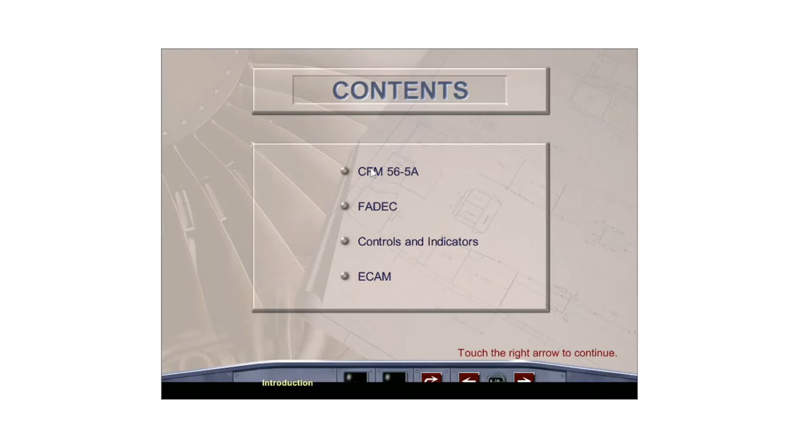The CFM 56-5A engine mounted on the A320 is a high bypass turbofan engine producing 25,000 pounds of thrust at sea level. It is produced by CFM International, a joint venture between SNECMA of France and GE Aircraft Engines of the USA. The engine core, based on the GE F101 engine installed on the Rockwell B-1B bomber, is manufactured in Cincinnati, and the low-pressure system is manufactured by SNECMA in Villaroche, France, where final assembly takes place.

The bypass ratio is 6.2 to 1. Approximately 80% of the thrust is produced by the 71.5-inch diameter fan, and the remaining 20% of the thrust is produced by the engine core. The engine weighs approximately 5,000 pounds.

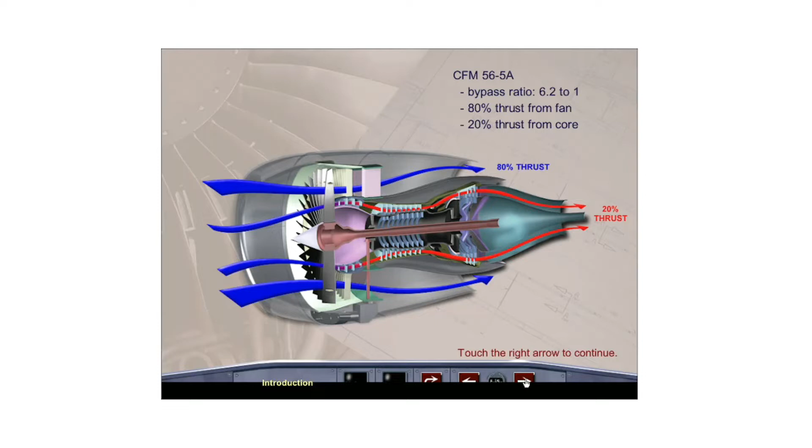A pylon attached to the wing supports the engine by 2 mounts, each secured to the engine by 4 bolts. The engine is enclosed by cowls that ensure the proper flow of air around the engine while protecting the engine and its accessories. Lightning protection is provided by using a conductive graphite material within the cowl skin. Reverse thrust is achieved by the positioning of 4 pivoting blocker doors that redirect the fan air forward.

The CFM56 engine is comprised of 4 primary modules: the fan and low-pressure compressor, the high-pressure compressor, combustion chamber and high-pressure turbine, the low-pressure turbine, and the accessory gearbox.

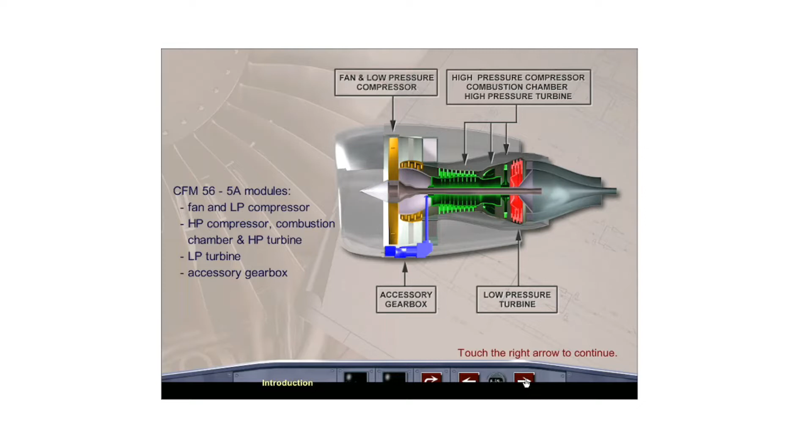The low-pressure, or N1 rotor, consists of a single-stage front fan and a 3-stage low-pressure compressor, which supercharges the inner portion of the fan airflow. They are driven by a 4-stage low-pressure turbine connected by the fan shaft. 4 stages of stator vanes are installed within the compressor section. The design of the spinner cone mounted on the front of the fan prevents the need for engine nose anti-icing.

The high-pressure, or N2 rotor, consists of a 9-stage high-pressure compressor driven by a single-stage high-pressure turbine. Compression is progressive as air passes through the successive stages of the compressor blades.

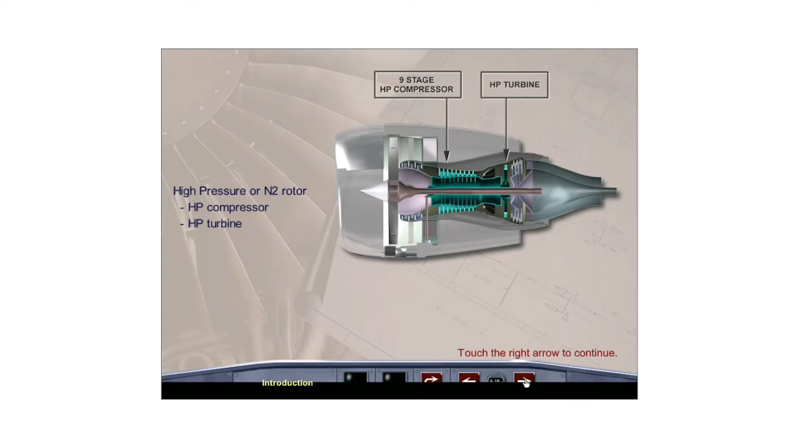The annular combustion chamber is located between the high-pressure compressor and the high-pressure turbine and is fitted with 20 fuel nozzles and 2 igniters.

The accessory gearbox, located below the fan case, is driven by the N2 rotor through a system of shafts and gears, and provides mechanical power to engine-mounted accessories, including the hydraulic pump, fuel pump, engine generator, FADEC generator, and starter unit.

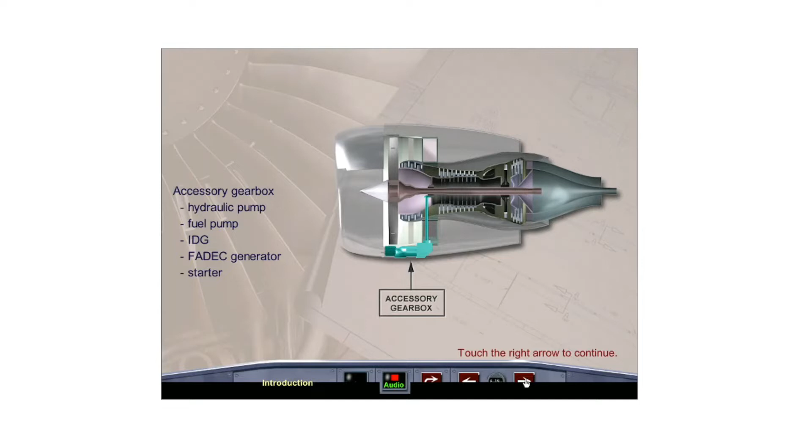Drain lines and collectors are installed to collect and carry waste fluids and vapors from areas around the engine that may leak and deliver them overboard through the drain mast located at the bottom of the cowling. Some fluids are discharged immediately, others are contained in a holding tank and discharged in flight when the aircraft speed reaches 200 knots.

Each engine is equipped with a Full Authority Digital Engine Control System, or FADEC, which manages all aspects of engine thrust and controls the engine start sequence.

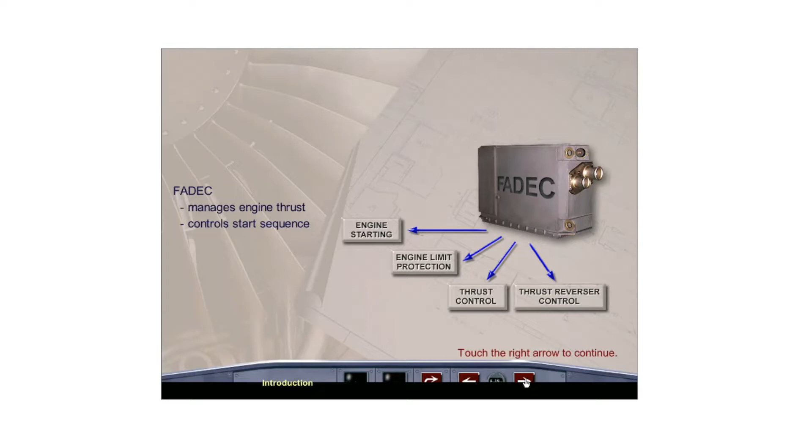The thrust levers are located on the center pedestal. The thrust lever control system is fully electrical. There is no direct mechanical linkage to the engines. Each thrust lever is also fitted with a reverse latching lever and an auto thrust instinctive disconnect push button.

The engine control panel, located aft of the thrust levers on the center pedestal, includes the engine mode selector, the engine master switches, and the fire and fault lights.

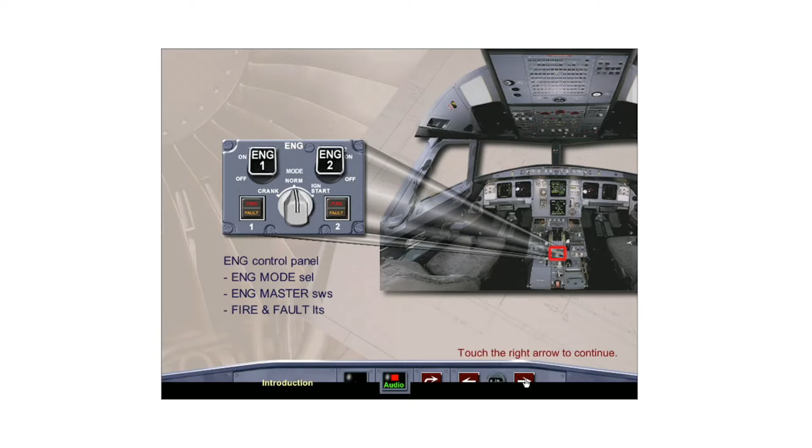The engine manual start panel, located on the overhead panel, is used to start the engines when an automatic start is not possible, or for dry cranking of the engine.

The engine FADEC ground power panel, located on the overhead maintenance panel, is used for maintenance purposes only to supply the FADEC with electrical power when the engines are shut down on the ground.

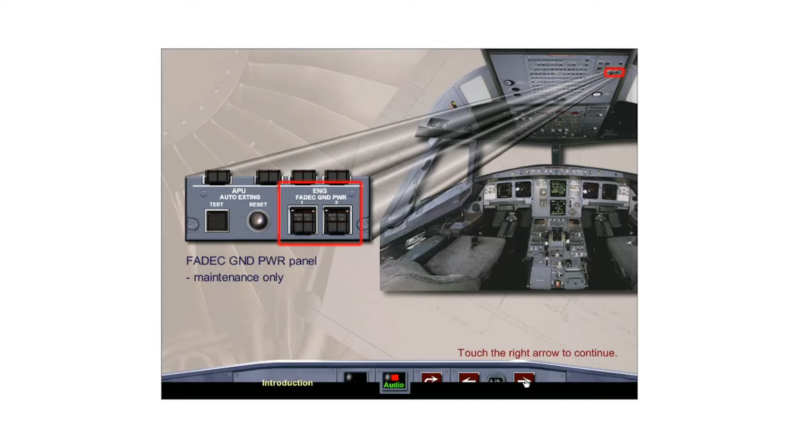The upper ECAM permanently displays the engine primary parameters to the flight crew. The secondary engine parameters are displayed on the lower ECAM engine page either automatically during engine start, when takeoff power is selected, and with certain engine faults. The ECAM engine page can also be selected at any time by the crew on the ECAM control panel.

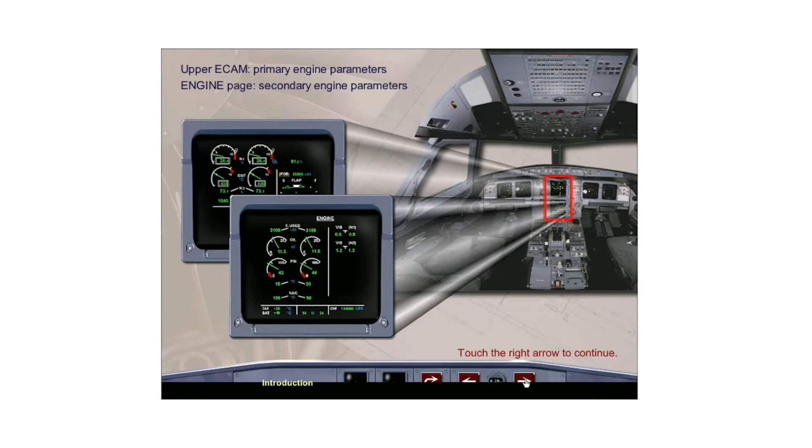Fuel used, oil quantity, and vibration indications are repeated on the ECAM cruise page.

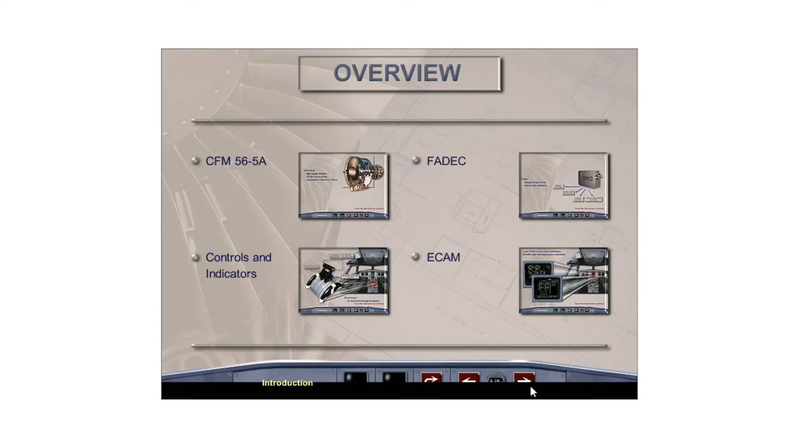FADEC, or Full Authority Digital Engine Control, provides a full range of engine control, manages engine starting and thrust, and optimizes engine operation. The FADEC system consists of a dual-channel electronic control unit, or ECU, mounted on the engine and a number of peripherals. The EIU, or Engine Interface Unit, located in the avionics bay, is the interface between cockpit controls and the FADEC.

FADEC automatically computes thrust parameter limits and displays them on the upper ECAM depending on thrust lever position. These parameter limits are max takeoff and go-around (TOGA), flexible takeoff (flex), max continuous (MCT), climb, and max reverse. Engine limit protection is provided through the use of governors preventing N1 and N2 from exceeding computed values.

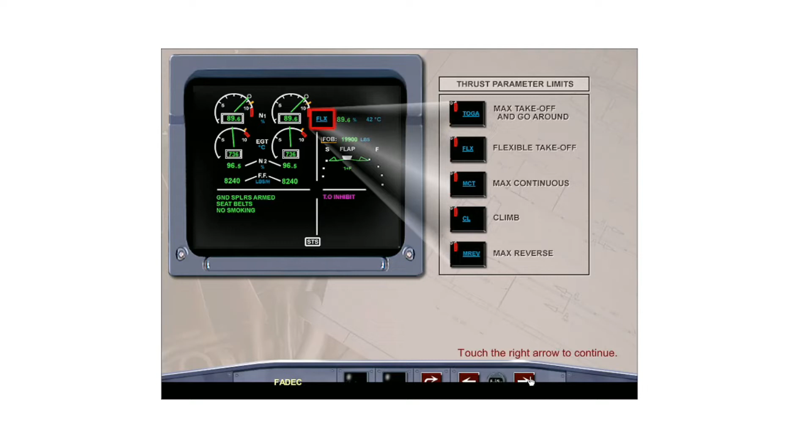FADEC adjusts the fuel flow to achieve the requested N1 as a function of two thrust modes: manual mode, with auto thrust off, which depends on thrust lever angle, and automatic mode, with auto thrust on, which depends on demands generated by the auto flight system.

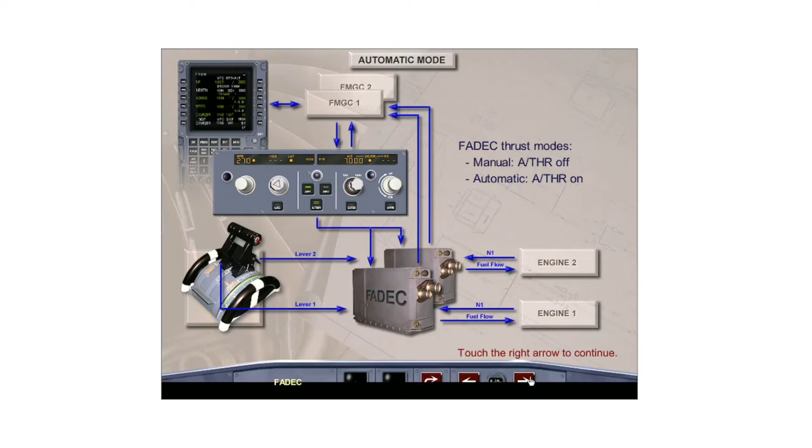Two takeoff power settings are available. If it is determined that a reduced thrust takeoff is possible, a flex temperature is entered into the performance takeoff page of the MCDU, and the thrust levers are advanced to the flex detent. If a full power takeoff is desired, the flex temperature field is left blank, and the thrust levers are positioned fully forward to the TOGA stop.

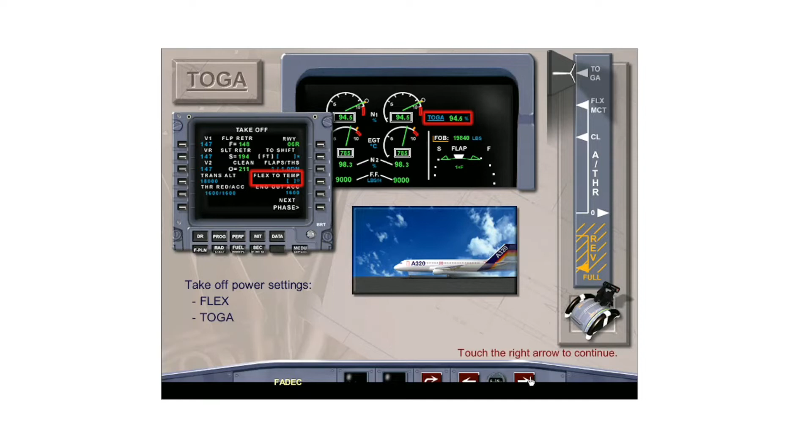FADEC also provides for two idle mode schedules: minimum idle, which varies depending on air conditioning and anti-icing demands, and approach idle, obtained when the slats are extended, which allows for faster engine spool-up should a go-around be necessary.

FADEC controls thrust reverser blocker doors actuation and thrust setting during reverser operation.

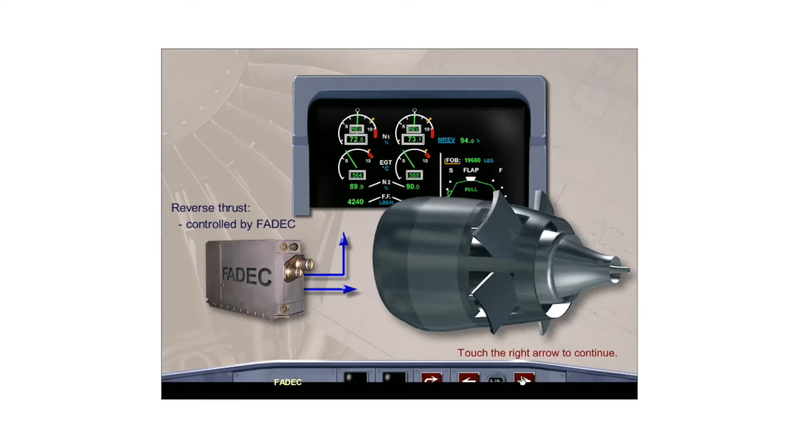FADEC controls the automatic start sequence by monitoring N1, N2, fuel flow, and EGT, and can abort or recycle an engine start. It also monitors the manual start sequence, but does not provide the same measure of control.

When the aircraft is first powered up, FADEC is supplied with aircraft system power for 5 minutes, performs a self-test, and then shuts down. During engine start, when the ignition start switch is selected to ignition, FADEC is again powered by the aircraft electrical system. However, when N2 reaches 12%, FADEC is supplied directly by its own dedicated electrical generator mounted on the accessory gearbox.

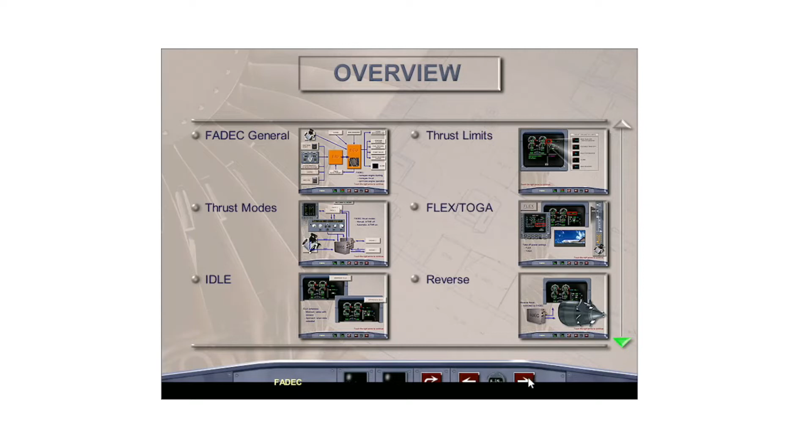The thrust lever is used either manually as a conventional thrust setting lever or automatically as a thrust limit selector, depending on where the thrust lever is positioned and whether the auto thrust is active. When auto thrust is active, the thrust levers remain fixed and do not move as engine thrust varies.

On takeoff, auto thrust is armed automatically through the FMGC when the thrust levers are set to the flex or TOGA position. The green light illuminates on the auto thrust push button located on the FCU, and the cyan auto thrust message appears in the right-hand column of the FMA. Auto thrust becomes active when, at the acceleration altitude, normally 1,500 feet, the thrust levers are selected to the climb detent with both engines operating, or to the MCT detent when only one engine is operating. This is indicated by the auto thrust message on the FMA turning white.

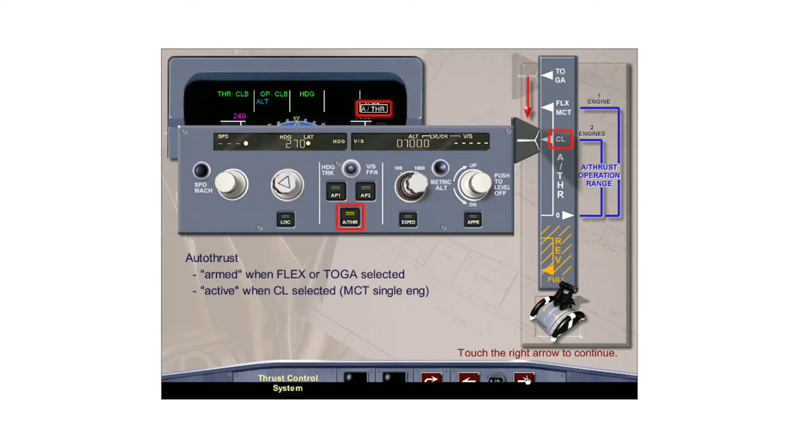In flight, with both engines running, setting the thrust levers forward of the climb detent deactivates the auto thrust, but it remains armed. The auto thrust message on the FMA changes to cyan. Auto thrust is reactivated as soon as the thrust levers are set back to the climb detent, as indicated by the white auto thrust message.

With auto thrust active, the Flight Management Guidance Computer (FMGC) computes the thrust required according to the demands from the MCDU and/or the FCU, then transmits this data to FADEC via the FCU. FADEC then controls the fuel flow in order to achieve the desired N1. The thrust lever acts only as an N1 upper limit, which FADEC computes and displays on the upper ECAM. These limits are climb, with both engines operating, and MCT with one engine inoperative.

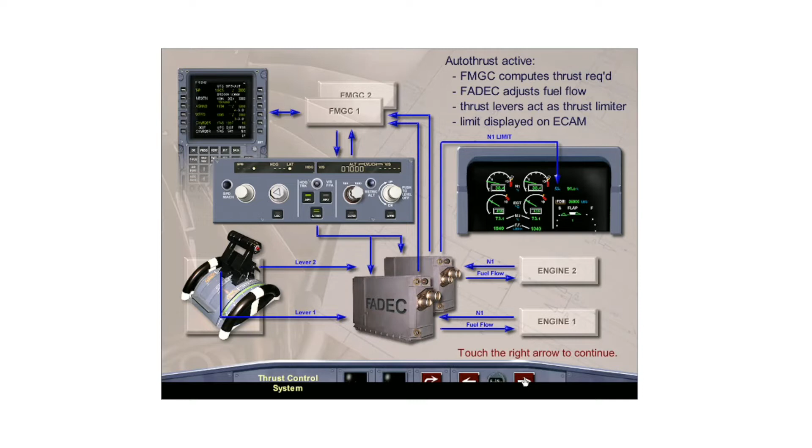The auto thrust can be disconnected by pushing an auto thrust instinctive disconnect push button located on the sides of the thrust levers, by setting both thrust levers to the idle detent, or by depressing the auto thrust push button located on the FCU glare shield panel. Caution: if the instinctive disconnect push button is held for more than 15 seconds, the auto thrust system is disconnected for the remainder of the flight.

When the auto thrust is disconnected with the auto thrust push button on the FCU or with the instinctive disconnect push button, the amber thrust lock message flashes in the first column of the FMA. The thrust is locked at its current setting and will not change until the thrust levers are moved out of the climb detent.

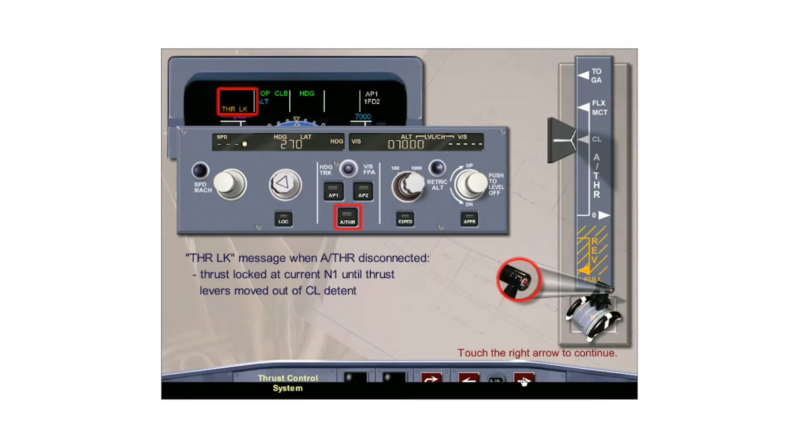In the manual mode, the thrust levers operate direct thrust control. The thrust control system is in the manual mode when the auto thrust is deactivated or is armed but not active because the thrust levers are not in the auto thrust operating range. The N1 command is computed by FADEC according to the thrust lever angle set by the pilot.

The N1 rating limit, displayed on the upper ECAM, is that corresponding to the next upper detent point. For example, with the thrust lever set midway between idle and climb, the N1 limit displayed is climb. With the thrust lever set midway between climb and MCT, the N1 limit displayed is MCT.

The small white circle or donut on the top of the N1 indicator shows the actual position of the thrust lever and is visible with and without the auto thrust on. The blue N1 transient arc shows the difference between the actual N1 and the commanded N1 as the engine spools up or down to match the desired setting. It is visible only when the auto thrust is on.

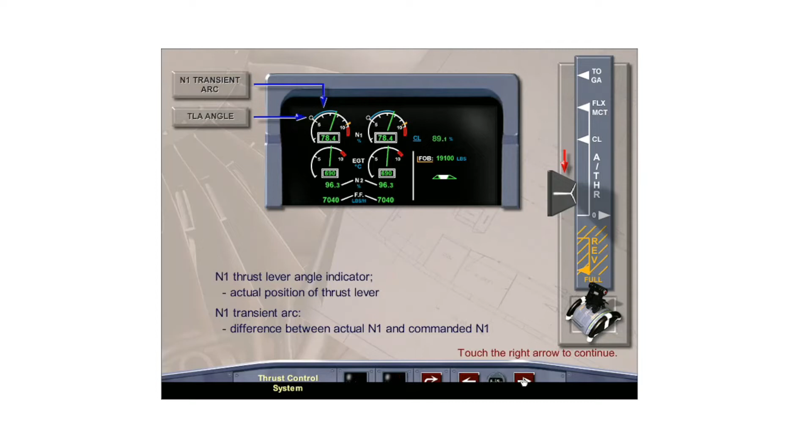To obtain reverse thrust settings, the thrust lever must be in the idle position and the thrust reverse latching lever must be lifted, allowing the thrust lever to move into the reverse thrust range. Reverse thrust can be modulated from idle to full reverse.

The engine fuel system is designed to provide fuel to the engine combustion chamber, the IDG cooling system, and to the actuators of the compressor flow control and rotor blade clearance systems, which will be covered later.

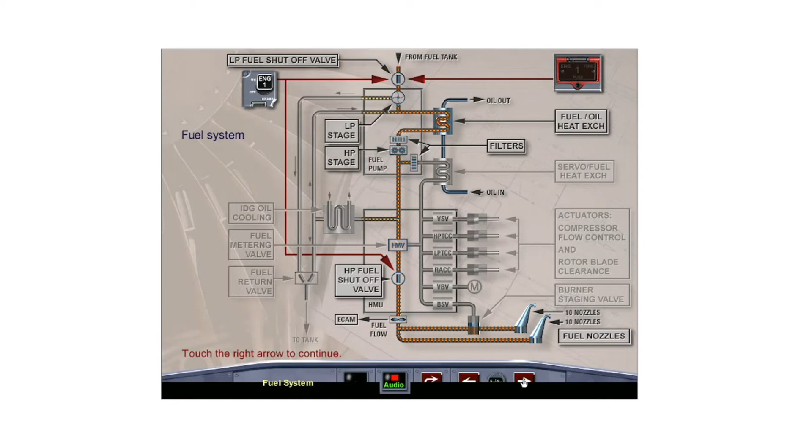The hydromechanical unit controls fuel flow to the combustion chamber by means of a burner staging valve, or BSV. The BSV delivers fuel to either all 20 fuel nozzles or to every other nozzle as commanded by FADEC. 10 fuel nozzles are always on, but for takeoff and other high-power operations, all 20 fuel nozzles are utilized.

Fuel flow is displayed on the upper ECAM in pounds per hour. Fuel used is displayed at the top of the engine page and is repeated on the cruise page. The figure is reset the next time the engine is started on the ground.

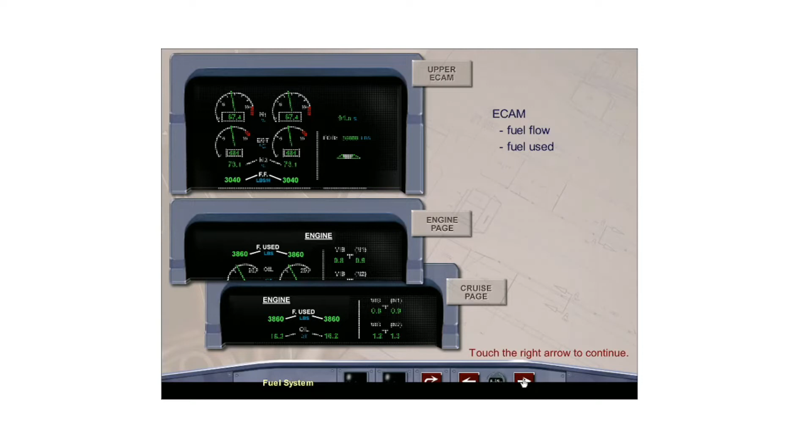The fuel filter clog indication appears in amber if the fuel filter becomes clogged.

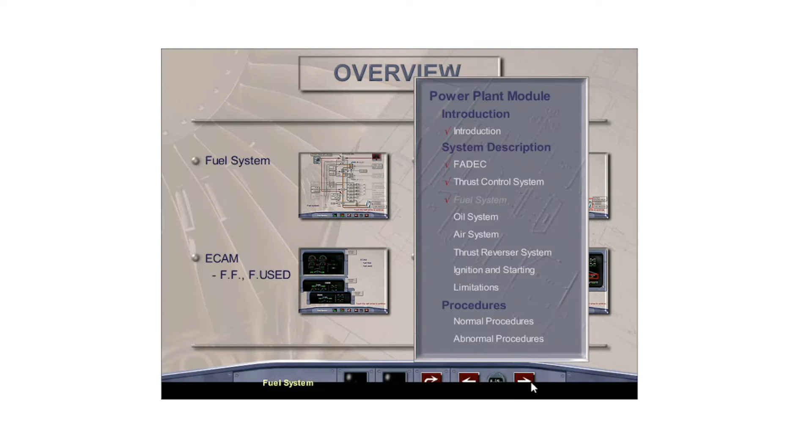The oil system lubricates the engine components and includes an oil supply system and oil scavenge system. Oil from the tank passes through a supply pump and filter and lubricates the forward and aft bearings and the accessory and transfer gearboxes. Oil returns to the oil tank by means of 4 scavenge pumps protected by strainers and chip detectors and is cooled by the fuel oil heat exchangers.

The oil flow rate at takeoff is over 43 quarts per minute. The max oil consumption is 1.6 quarts per hour, enabling the engine to operate for approximately 16 flight hours.

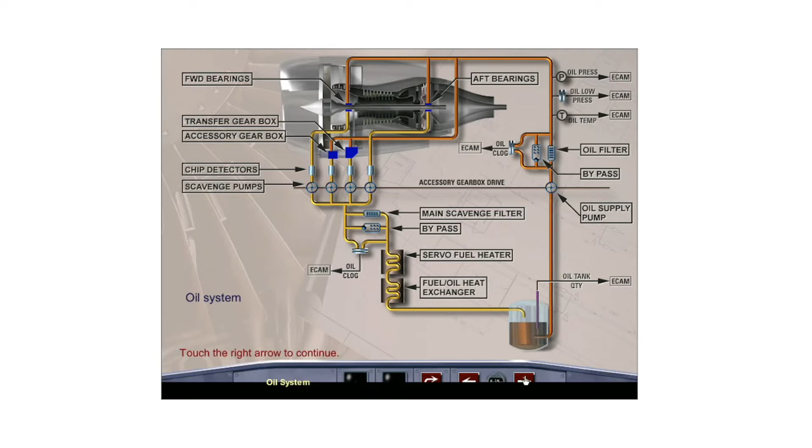Oil system indications are displayed on the ECAM engine page. Oil quantity, displayed in green, pulses when quantity drops below 3 quarts. Oil quantity only is also displayed on the ECAM cruise page.

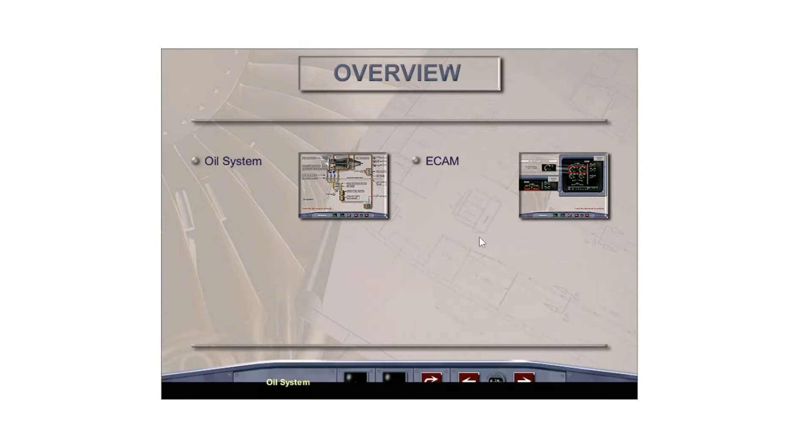FADEC provides for engine optimization by controlling compressor airflow through the use of variable bleed valves and variable stator vanes. At low engine RPM, the compressor provides more air than the engine can utilize, so the 12 variable bleed valves, actuated through the HMU, open to discharge excess air back into the fan air stream. The variable bleed valves close as N2 increases.

The angle of the inlet guide vane and the first 3 stator vanes of the high-pressure compressor are variable to optimize performance and provide adequate stall margin over a wide range of operating conditions. The vanes are positioned by HMU-operated actuators controlled by FADEC. As N2 increases, the variable stator vanes open to allow a greater airflow through the compressor.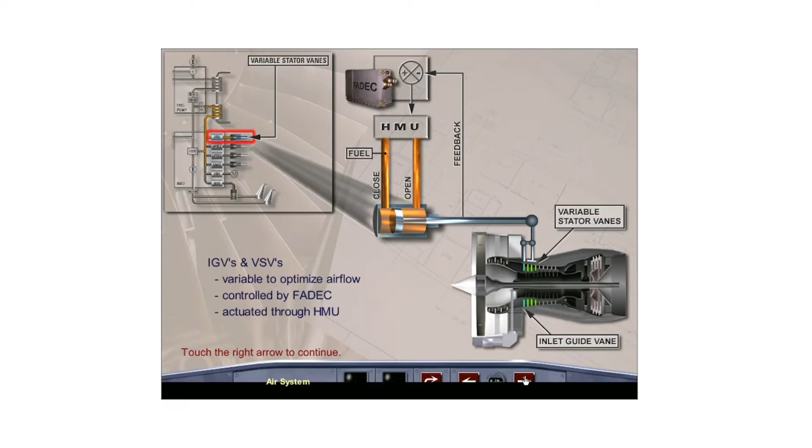3 systems control and adjust the clearance between the rotor blades and stator casing. This improves efficiency and reduces fuel flow and EGT. These are the rotor active clearance control system, the high-pressure turbine clearance control system, and the low-pressure turbine clearance control system. Each is controlled by FADEC and is actuated with fuel hydraulic pressure provided by the HMU.

Rotor active clearance control is achieved by directing hot 5th stage high-pressure compressor air into the high-pressure compressor rotor cavity, which causes the rotor blades to expand and reduces clearances between the blades and the casing. It becomes active above 8,000 feet in order to prevent blade tip rub at takeoff.

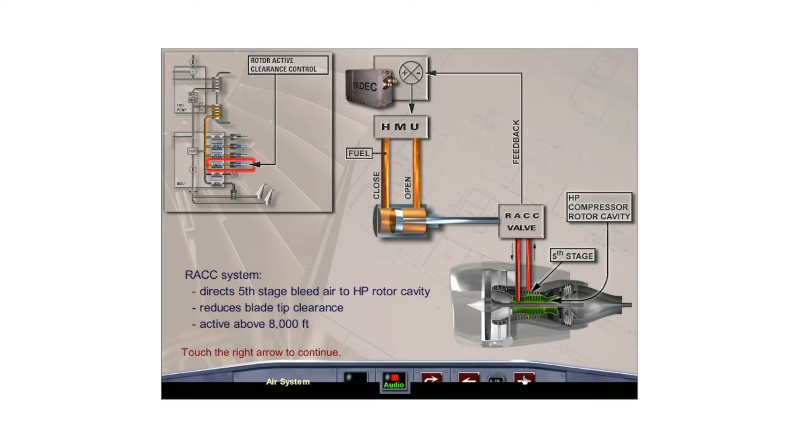The high-pressure turbine clearance control system uses 5th and 9th stage bleed air to control thermal expansion of the high-pressure turbine shroud in order to optimize blade tip clearances and maximize high-pressure turbine performance.

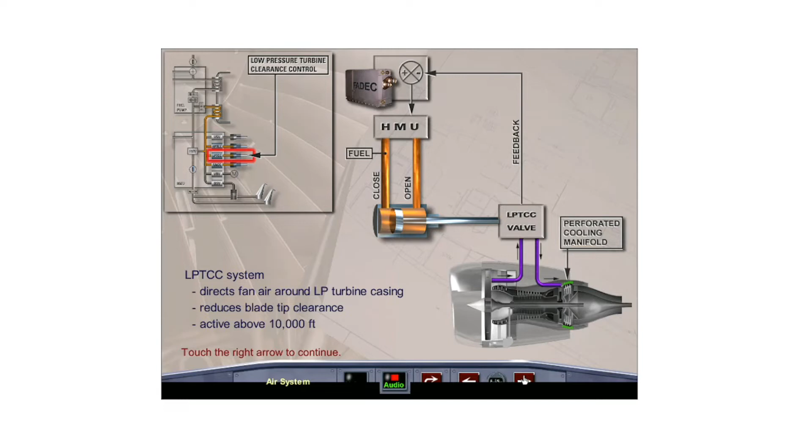The low-pressure turbine clearance control system optimizes low-pressure turbine clearances above 10,000 feet by allowing cool fan air into the perforated cooling manifold surrounding the low-pressure turbine casing.

In flight, the ECU is cooled by air entering the fan casing through a scoop on the engine cowl. The air is then exhausted overboard. On the ground, where there is no ram air effect, cooling airflow is provided by means of a jet pump supplied with pneumatic air from the starter duct, which is always pressurized when the engine is running.

The engine nacelle compartment cooling system provides airflow to offset the effects of combustion compartment heating and for the cooling of engine-mounted accessories. The fan compartment has a flush air inlet on the lower portion of the fan cowl. Air enters the inlet, passes around the accessory gearbox area, and is then vented overboard.

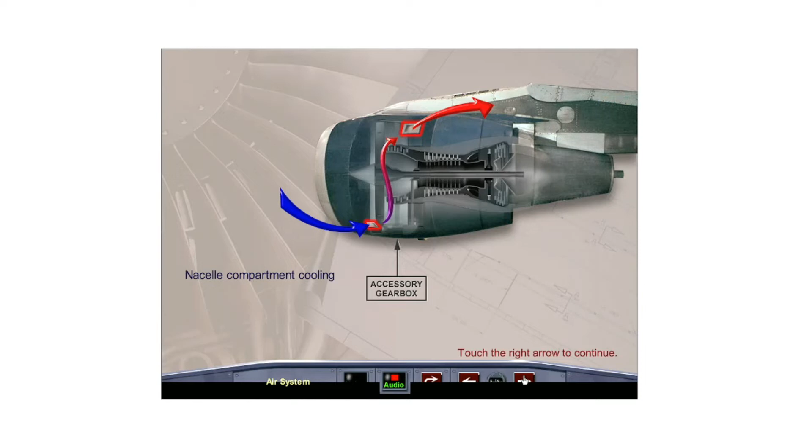The hot core compartment is cooled with fan discharge air taken in by 4 flush inlets installed in the core cowl.

A nacelle temperature sensor installed near the forward engine mount measures the fan compartment temperature. It can indicate an overheat condition due to loose or broken air ducts. The measurement range is -55 to +300 degrees and pulses green as an advisory only when the nacelle temperature reaches 240 degrees. The ECAM engine page automatically displays when this occurs.

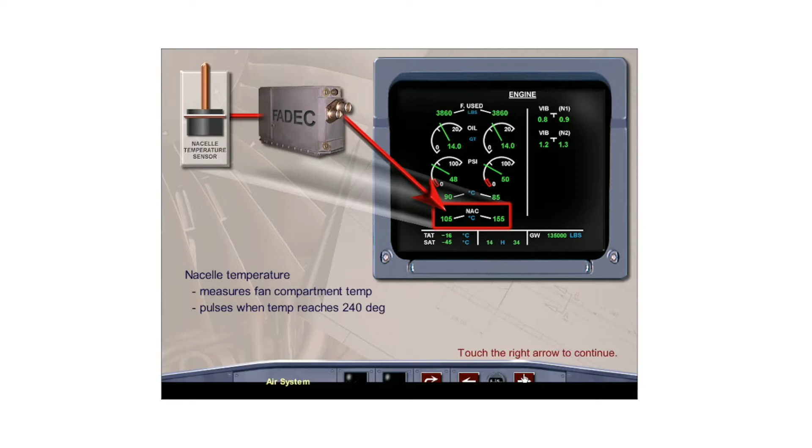The thrust reverser system utilizes hydraulic power from its respective hydraulic pump mounted on the engine. A hydraulic control unit, or HCU, controlled by FADEC, positions 4 pivoting blocker doors that redirect the fan air forward. The aircraft must be on the ground and the engine must be running.

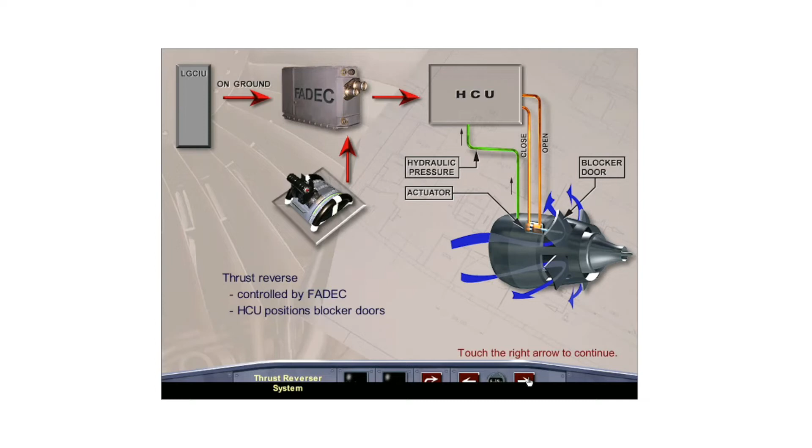When reverse thrust is selected, FADEC sends a signal to the HCU, which sends hydraulic pressure to the unlock side of the blocker door latches, then to the deploy side of the blocker door actuators. Each door operation is independent of the others and takes less than 2 seconds to deploy. Touch the thrust levers to select reverse thrust.

During the deployment sequence, as soon as the first pivoting door opens, the amber reverse indication is displayed on the N1 indicator. When all 4 doors have reached 95% of their full travel, the reverse indication changes to green. Hydraulic pressure is then released from the system.

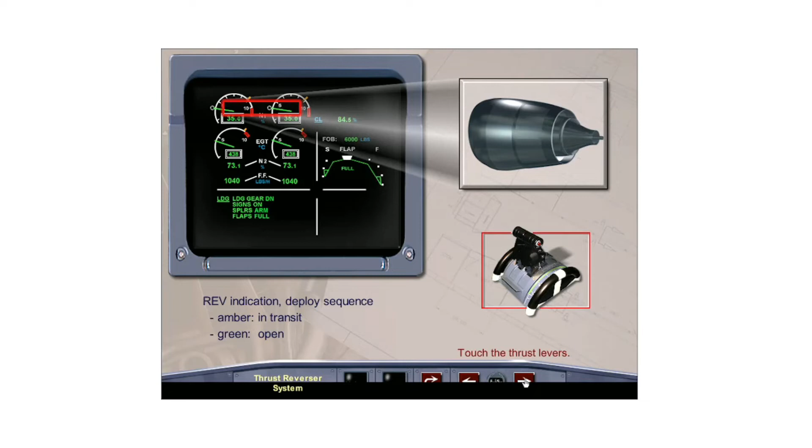During the stow sequence, the HCU sends hydraulic pressure to the retract side of the door actuators. When the first blocker door begins to close, the reverse indication changes to amber. When all doors are closed, the reverse indication disappears.

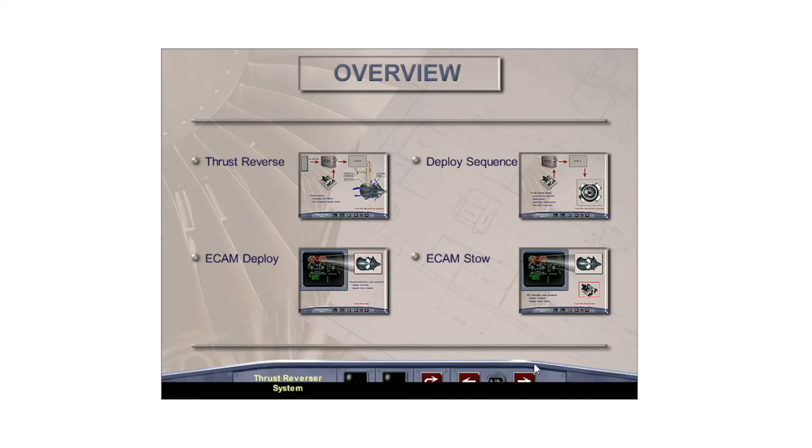FADEC controls the ignition system, utilizing 2 igniter boxes per engine to convert 115-volt AC power into high-voltage energy for engine starting and for engine flame-out protection.

During an automatic start, only 1 igniter fires, and FADEC alternates igniters used on successive starts. Ignition comes on when N2 reaches 16% and cuts off when N2 reaches 50%.

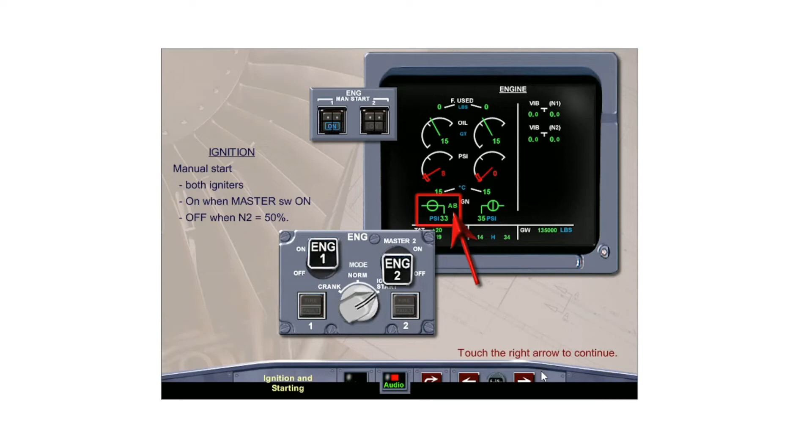During a manual start, both igniters fire when the master switch is placed to on, and they stop when N2 reaches 50%.

Continuous ignition is automatically selected on when the engine anti-ice is turned on, an engine flameout is detected, or the engine interface unit fails. Ignition may be manually selected on by placing the engine mode selector to ignition.

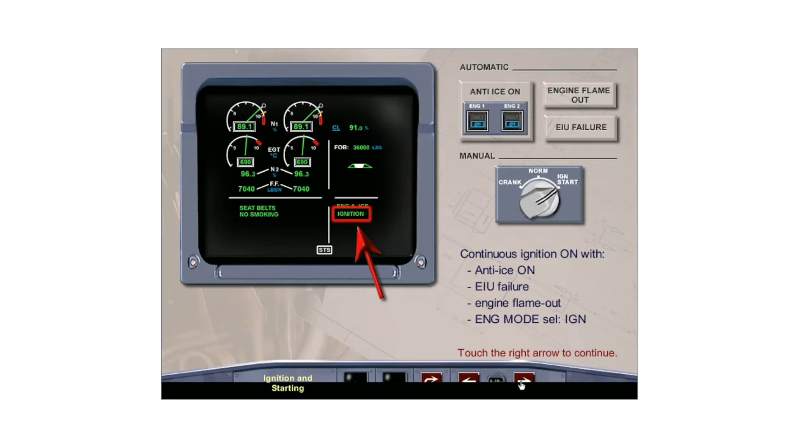The engine start system consists of a start valve, an air starter, 2 ignition boxes, and 2 igniters A and B. Pneumatic air for starting is provided by the APU, a ground pneumatic start unit, or in the case of a crossbleed start, by the other operating engine.

If there is an electrical fault in the start valve, a manual override handle allows a ground crewman to operate the valve manually.

The starter uses the same drive gear system as the accessory gearbox, only in reverse. Air from the start duct turns the starter turbine, which in turn drives the N2 rotor through the accessory gearbox driveshaft. At 50% N2, the centrifugal clutch disengages.

If the clutch fails to disengage, cutter pins inside the starter unit will cut the rim from the turbine wheel, containing the parts within the starter unit.

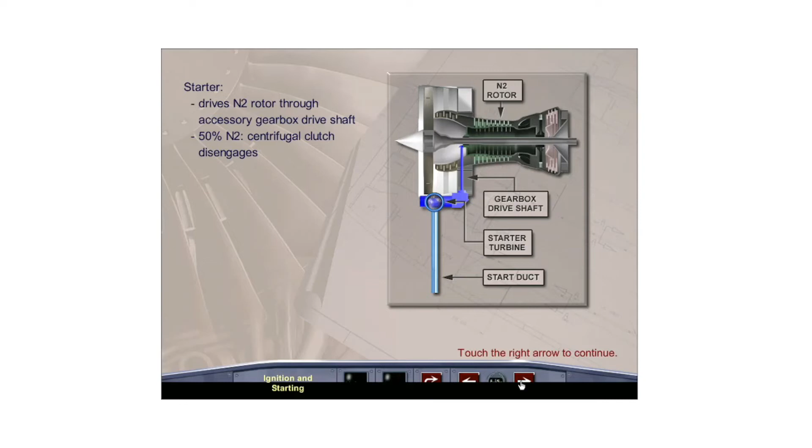There are 2 start modes, automatic and manual. For an automatic start, FADEC has full authority over the start valve, ignition, and fuel, and will abort the start in the case of start valve failure, starter engagement time limit, ignition failure, HP fuel shutoff valve failure, high EGT, engine stall, hung start, overspeed, or no light up.

Select the engine mode selector to ignition start. Then after all amber X's have disappeared from the upper ECAM, indicating that FADEC has powered up, place the master switch to on.

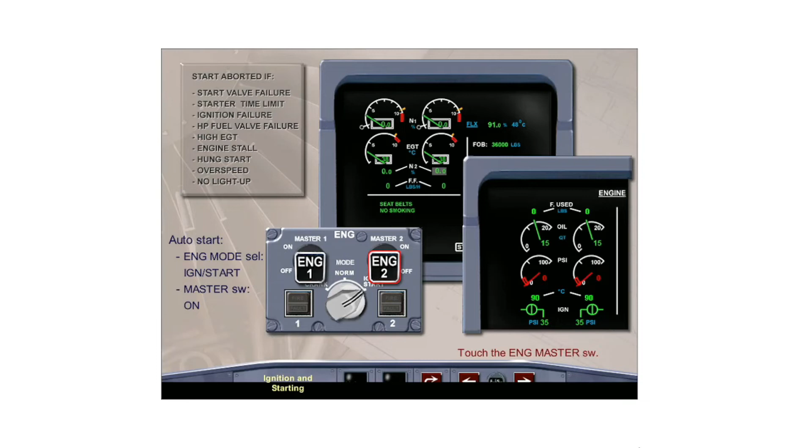Start fault messages are generated to the ECAM. The amber fault light on the engine control panel also illuminates if a fault is detected or if there is a disagreement between the high-pressure shutoff valve and the master switch.

When a start fault is detected, FADEC will crank the engine to clear out any fuel vapors, then control any additional start attempts if allowed. Up to 3 additional starts will be attempted depending on the fault.

The automatic start sequence can be interrupted at any time by placing the master switch to off. Note, once the master switch has been placed to on, selecting the engine mode selector from ignition start to norm has no effect on the start sequence.

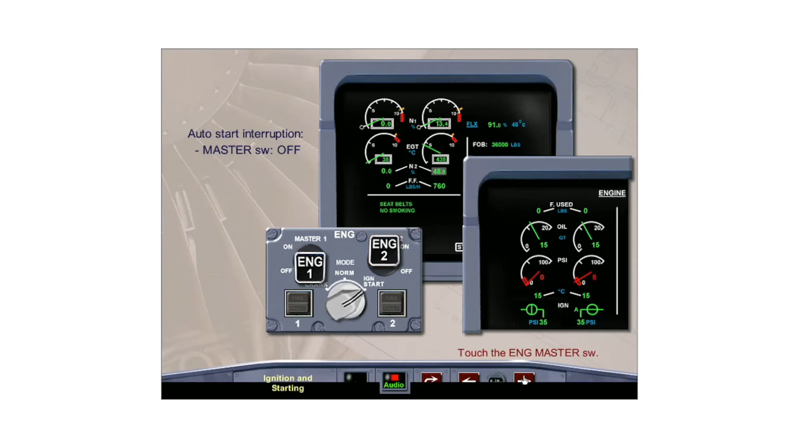For an in-flight start, FADEC determines whether the engine is windmilling fast enough or needs assistance from the starter. Both igniters are activated. In the event of an abnormal start, fault warnings are generated, but FADEC does not automatically abort the starting sequence.

If an automatic start has been aborted due to engine stall, high EGT, or low start air pressure, or if it is anticipated that start pressure will be marginal due to hot or high conditions, use the manual starting procedure. A manual start is accomplished by selecting ignition start on the engine mode selector.

The ECAM engine page appears. After all amber X's on the upper ECAM page disappear, select the manual start push button switch to on.

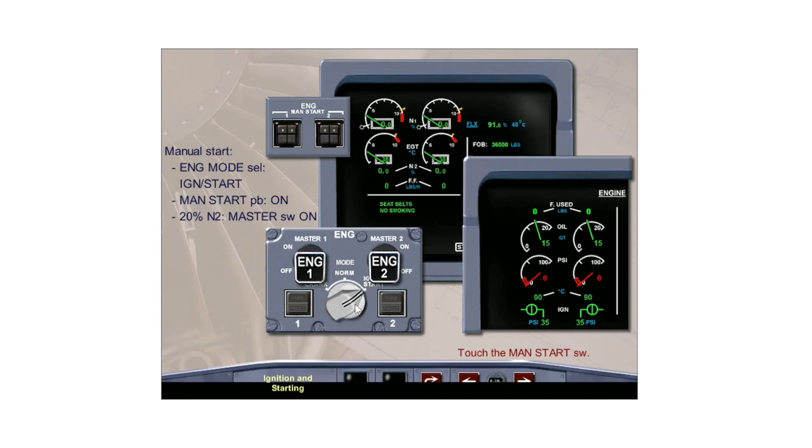The start valve opens. At 20% N2, the master switch is placed to on, and ignition and fuel are introduced. When N2 reaches 50%, the start valve closes and the ignition goes off. The engine manual start push button is then selected off.

After the second engine is started, the engine mode selector is selected back to norm.

During a manual start sequence, FADEC monitors start parameters and generates abnormal start messages to ECAM. The crew must take the appropriate actions to abort the start. The only exception is if the start EGT is exceeded before 50% N2. In this case, FADEC aborts the start.

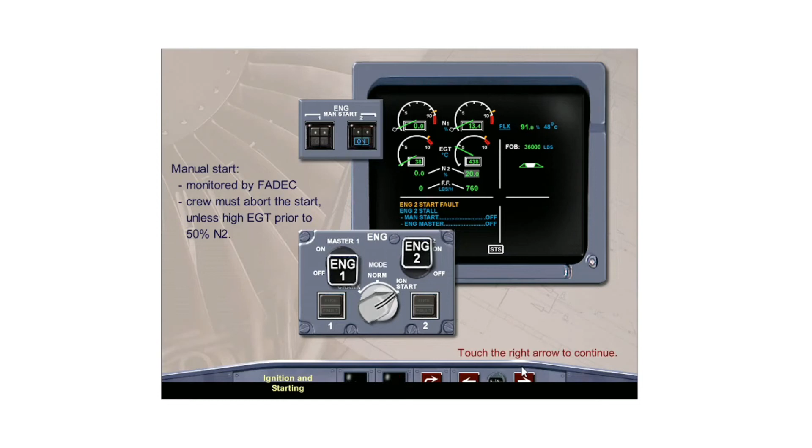The crew interrupts a manual start before the master switch is placed to on by switching the manual start push button switch to off. After the master switch has been placed to on, the start is aborted by switching the manual start push button switch to off and then placing the master switch to off.

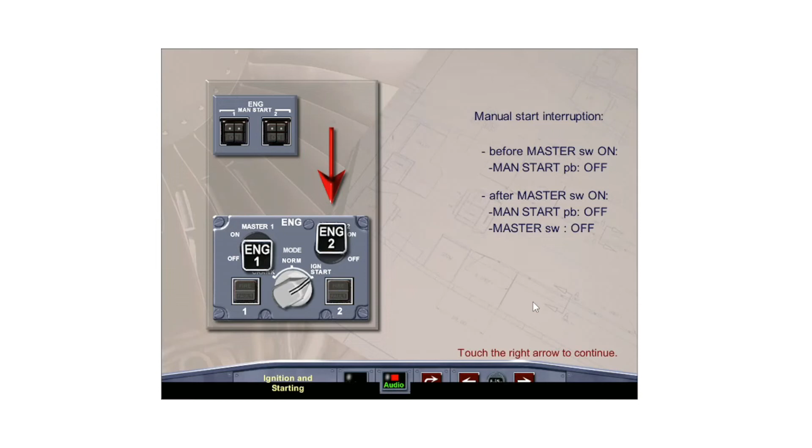Dry cranking allows the crew to ventilate the engine to remove fuel vapors after an unsuccessful start attempt. The engine mode selector is set to crank and the manual start push button is set to on. Do not re-engage the starter when N2 is greater than 20%.

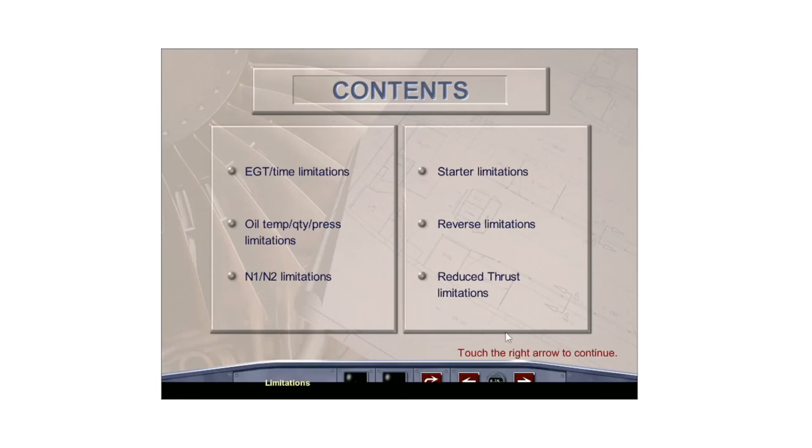Takeoff and go-around thrust is limited to 5 minutes, except with an engine failure, the time limit is 10 minutes. The max EGT for takeoff and go-around is 890 degrees. The max EGT for max continuous and climb thrust is 855 degrees. The max EGT for starting is 725 degrees.

The max continuous oil temperature is 140 degrees. 155 degrees is allowed for 15 minutes max. The minimum starting oil temperature is -40 degrees. For oil pressure and oil quantity limitations, see FCOM 3.

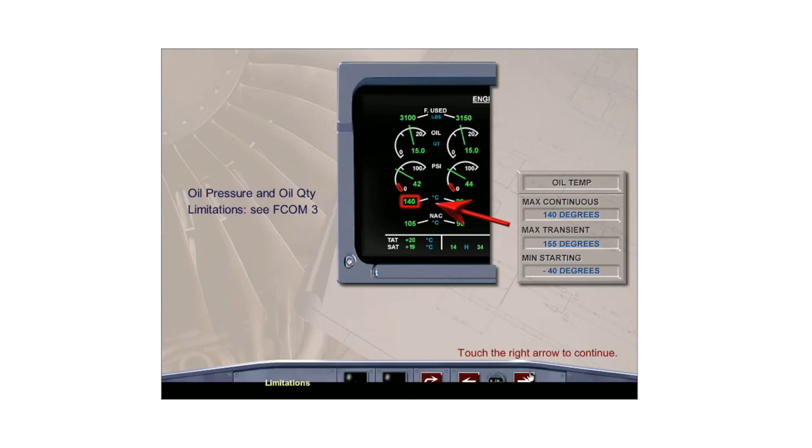The maximum N1 is 102%. The maximum N2 is 105%.

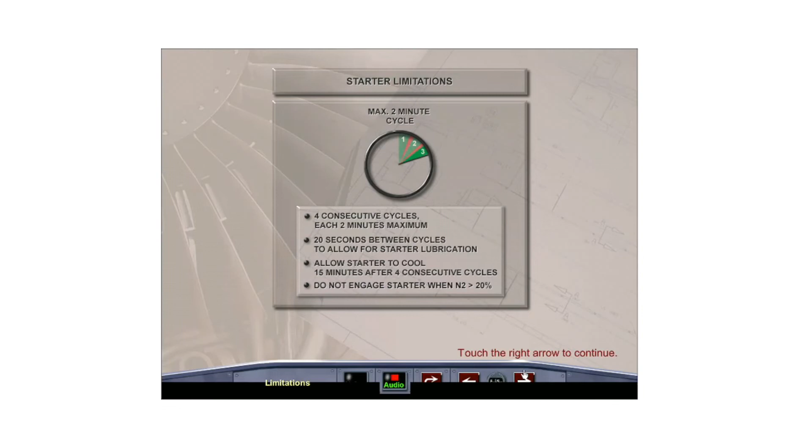4 consecutive start cycles are allowed, each with a 2-minute maximum duration. 20 seconds must be given between start cycles to allow for starter lubrication. After 4 cycles, 15 minutes must be given to allow for starter cooling. Do not engage the starter when N2 is greater than 20%.

Attempting to select reverse in flight is prohibited. Backing up of the aircraft is also prohibited. Max reverse thrust should not be used below 70 knots.

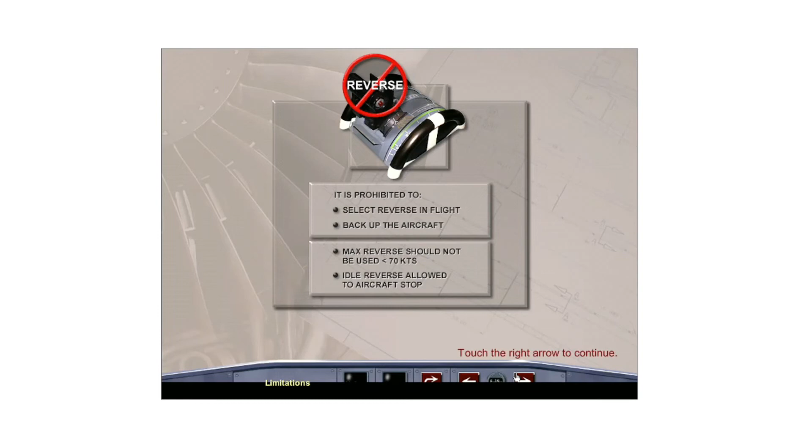Reduced thrust takeoffs are not permitted on contaminated runways, or with one or more thrust reversers inoperative, or with any other inoperative system such as brakes or anti-skid, which may affect stopping performance. Refer to the MEL.

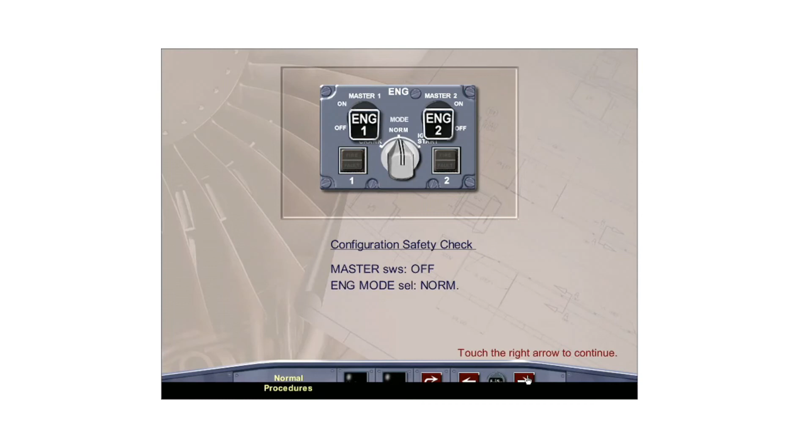During the configuration safety check, confirm the master switches are off and the engine mode selector is set to norm. During the cockpit geographic check, check that the engine manual start panel switches are guarded and the lights are out.

On the lower ECAM display, confirm the engine oil quantities are sufficient for flight. Confirm the thrust levers are at idle, the engine master switches are off, and the engine mode selector is in the norm position.

When ready to start, select the engine mode selector to Ignition Start and confirm the amber X's have disappeared on the upper ECAM to indicate FADEC has powered up.

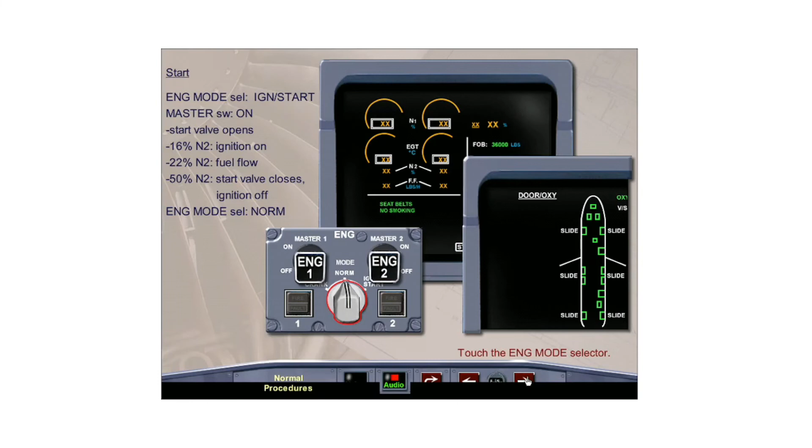Before takeoff, if it is desired to use a flex takeoff procedure, confirm that a flex temperature has been entered into the MCDU perf page.

Before takeoff, select the engine mode selector to ignition if there is heavy rain, standing water or snow on the runway, or heavy rain or severe turbulence is expected after takeoff.

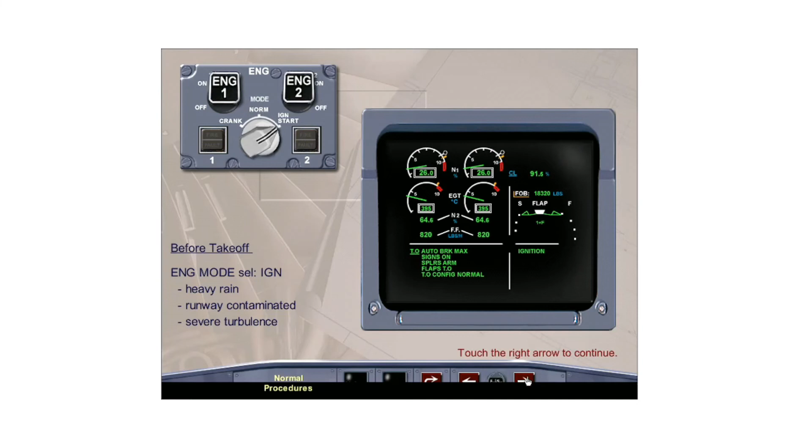When ready for takeoff, advance the thrust levers to approximately 50% N1. Allow the engines to stabilize together, then smoothly advance the thrust levers to the flex or toga detent.

Confirm that flex or toga is annunciated on the FMA and that auto thrust is displayed in cyan to indicate it is armed. Any change to the FMA will be boxed in white for a period of 10 seconds. Prior to 80 knots, confirm that the commanded N1s have been achieved on the N1 indicators.

When the acceleration altitude has been reached, normally 1,500 feet, climb will flash in amber on the FMA. Bring the thrust levers back to the climb detent and observe that the FMA indicates climb.

The auto thrust, which was armed when the thrust levers were placed in the flex or toga position, will now become active as indicated by the white auto thrust message in the right-hand column of the FMA. As long as the aircraft is climbing unrestricted, the thrust achieved will be max climb thrust.

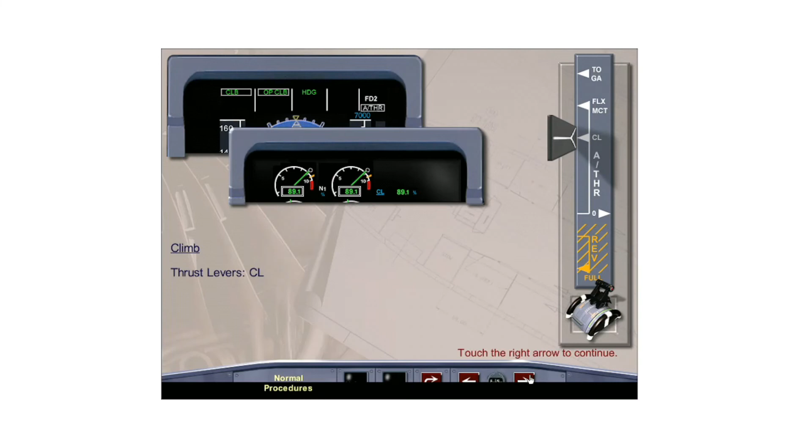When the cruise altitude is reached, the auto thrust system will vary the N1s to maintain the desired cruising speed as determined by the FMGC or the pilot through the FCU. The thrust levers are left in the climb detent, acting only as an N1 upper limiter.

When the aircraft descends, again the thrust levers are left in the climb detent. In an unrestricted open descent, the thrust is reduced to idle, but the thrust levers do not move. If an intermediate level off is required, the power increases to maintain the altitude and airspeed, and the auto thrust system uses the thrust lever position as an upper N1 limit.

At 20 feet, the auto call-out system asks the pilot to retard the thrust levers during flare. Retard. Pull the thrust levers back to the idle position. When the main landing gear is firmly on the runway, raise the reverse latching levers and move the thrust levers into the reverse operating range.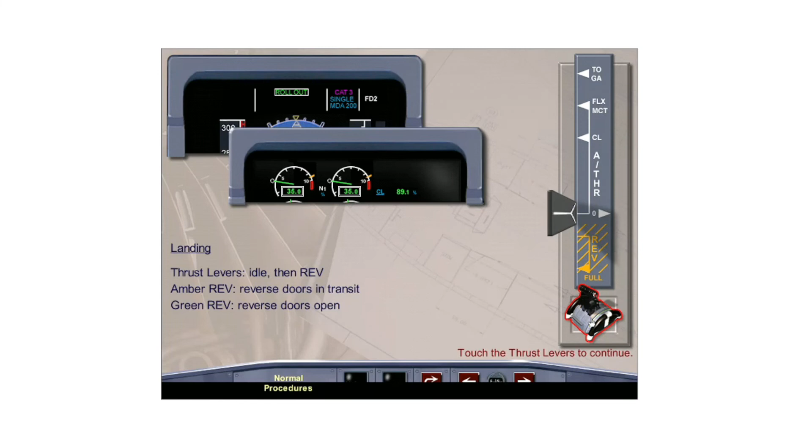On the N1 indicators, the amber reverse indication appears, indicating that the reverser blocker doors are in transit. When the doors are open, the reverse indication turns to green.

At approximately 70 knots, move the thrust levers to the reverse idle position, pausing momentarily to allow the engines to spool down. Then, push the thrust levers forward to cancel reverse and return them to the forward idle position.

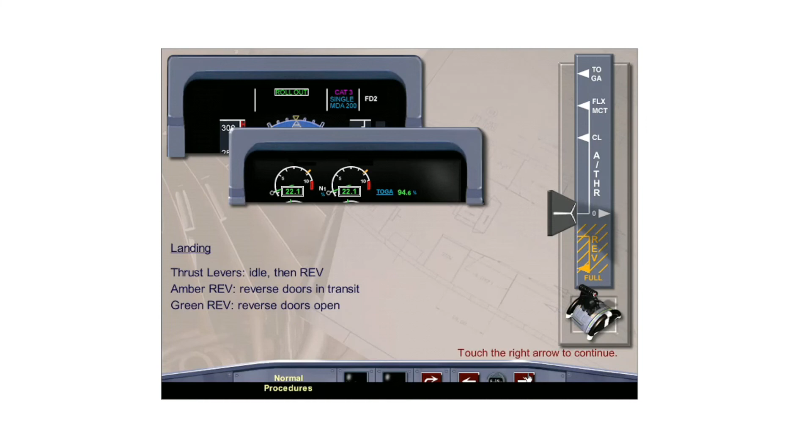On shutdown, ensure at least 3 minutes of engine operation at idle if max reverse thrust was used. Then once APU or external power is available, select the engine master switches to off.

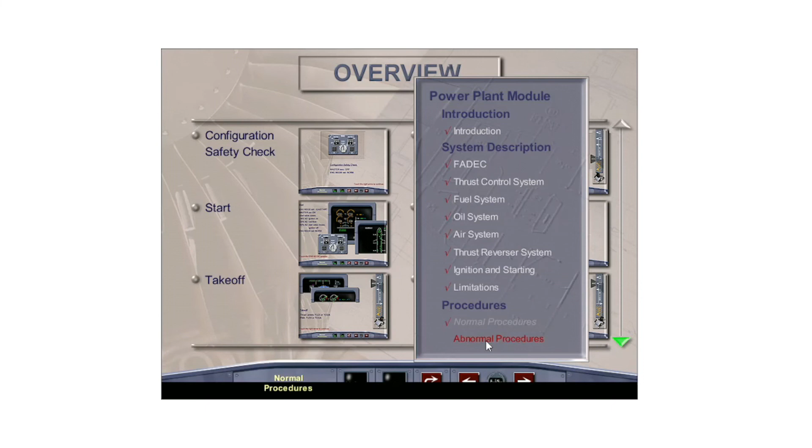With a tailpipe fire on the A320, the engine must be shut down. The procedure is not displayed on ECAM, but can be found in the QRH and FCOM3 abnormal and emergency procedures.

Do not press the engine fire switch, since this would cut off power to FADEC and prevent dry cranking of the engine. Select the engine mode selector to crank, the manual start switch to on, and motor the engine for at least 30 seconds, or until the burning has stopped, whichever is later. Call maintenance and inspect the engine for damage.

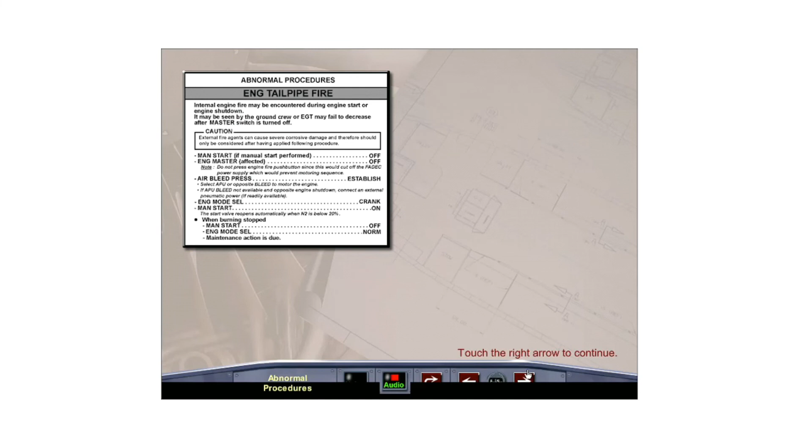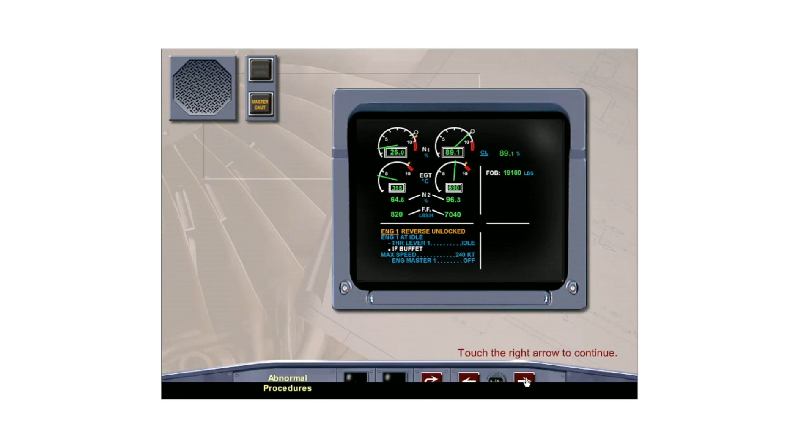Anytime at least one reverser door inadvertently opens, FADEC automatically commands the restow function. If a door remains open, the engine is also set to idle as indicated on ECAM. If buffet is felt, limit airspeed to 240 knots, then shut the engine down. Touch the right arrow to continue.

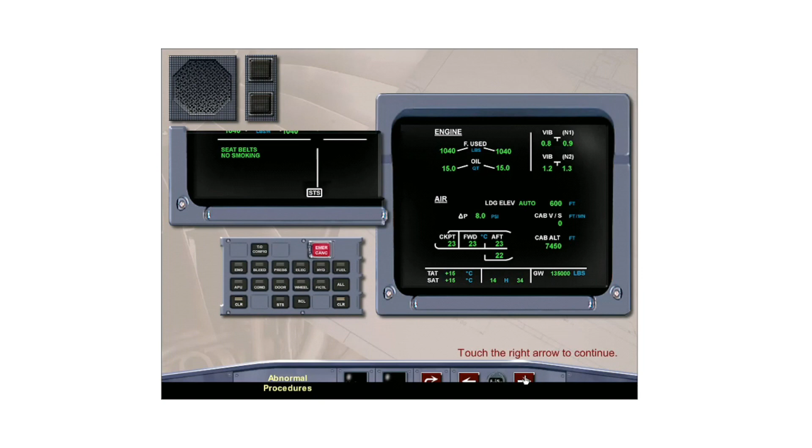A number of non-normal ECAM messages appear that only require crew awareness. Refer to FCOM 3, Abnormal and Emergency Procedures.